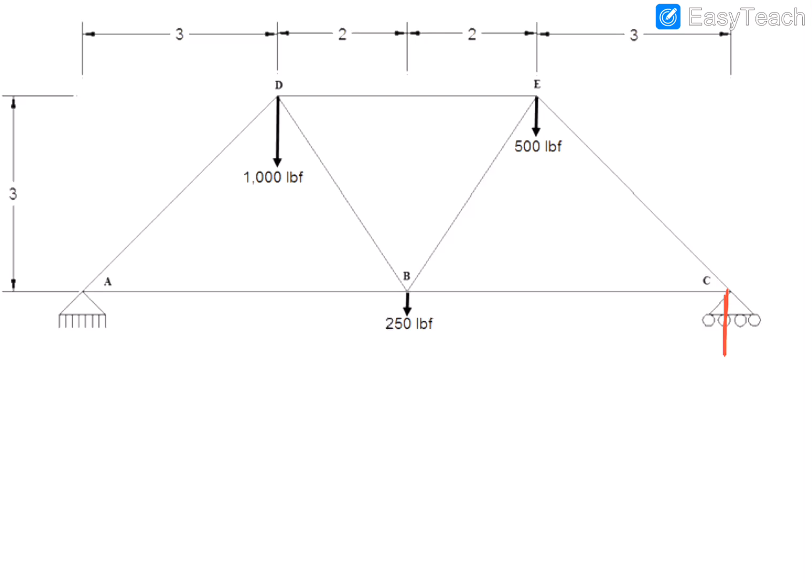All right, let's attempt this big problem here. We have a roller support over here on the right, so that's just going to be some kind of force like this. We have a pin support on the left, so I need to put in 2 forces. That's the first thing we always do. Next thing we want to do is maybe find some angles.

There was no angles given in this thing, so this angle A right here I know has to be 45 degrees because it would be 3 over and then 3 up, so those are equal sides, so I know that that's a 45 degree. That's the same over here, so this is 45 degree too. This thing is all symmetrical. This one here would be 2 over and 3 up. So this is 3 and this is 2.

So the angle here, the tangent of this angle would be the opposite, 3, over the adjacent, 2. I'll do that in the calculator real quick. 3 divided by 2, inverse tangent, I get 56.3. So this one is 56.3, and then this one is 56.3 also. Okay, I'll erase some of these things in here.

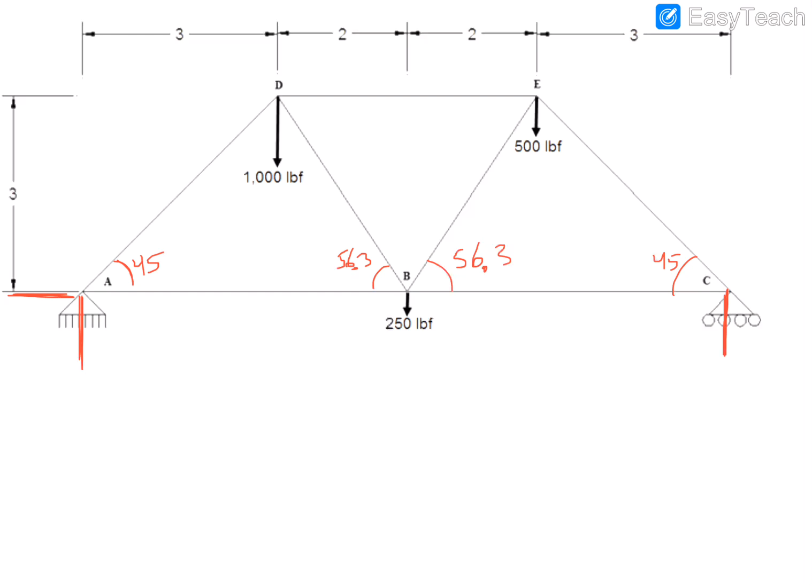All right, okay, that's good. So the first things, remember, we do is we do ups and downs, lefts and rights, and torques. So there is only one possible left or right force right down here on the side, and because there's only one and it needs to be balanced, we know we don't have to worry about it. This actually has to be 0. There's no force going that way. So I'm going to go ahead and erase that whole thing, don't actually need it.

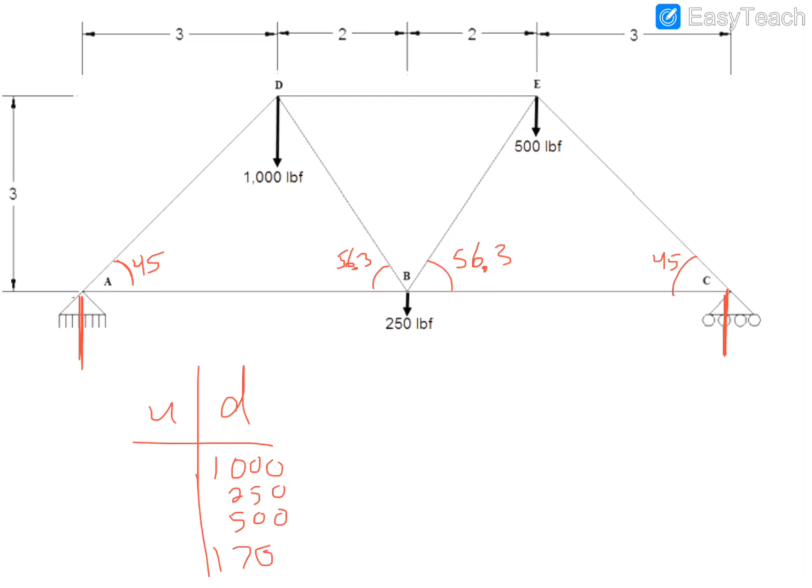Now we have ups and downs, so I'll just make a little chart, ups, downs. We have down is 1,000, we have 250, and we have 500. That's a total of 1,750 down. Ups we have, we'll call this F1, and we'll call this F2. We know that F1 is going to be an up, and F2 is going to be an up. There's going to have to counteract those 3 things. So we want to figure out maybe what F2 is and then be able to figure out what F1 is.

So what we're going to do first is we're going to do torques, clockwise, counterclockwise torques, and we're going to pick one of these sides as our reference point. I'll go ahead and choose this one. So right now we don't have to worry about what F1 is. We can figure out the torque. So if I go all the way over to here, I have a down one right here. That's going to be clockwise, it's going to go around this way.

1,000 times 3, that's clockwise. And then if I come all the way over here to this 250, I have 250 times 5. And then if I come all the way over to here, I have 500 times 7. Those are all clockwise torques.

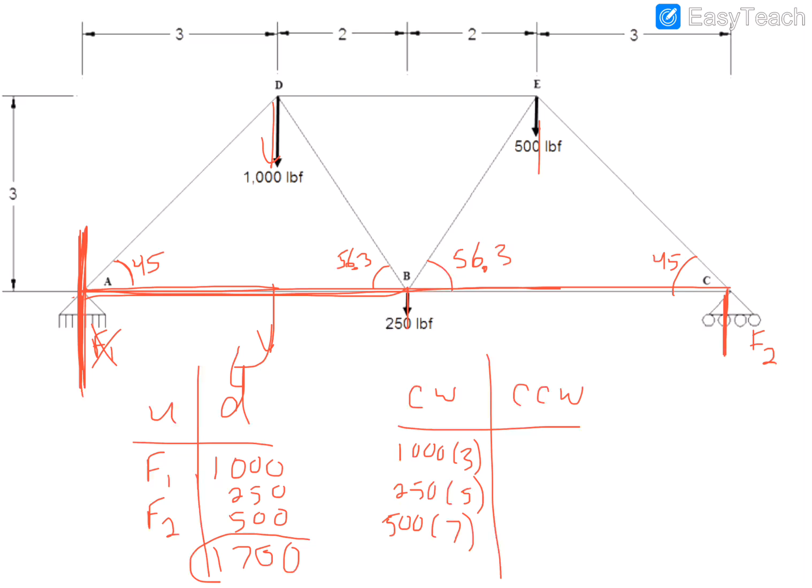Now if I come all the way over here to F2, okay, this has to be an up force to balance out all those other torques, so it's a counterclockwise torque. So F2 times 5, 6, 7, 10, times 10.

Okay, so I can add these all up. I'd have 3,000 plus 1,250 plus 3,500, gives me a total of 7,750. Divide that by 10, and my F2 over here should be 775.

And now I know that this F2 right here is 775. So I can take these downs, 1,750 minus 775, and I know that this over here is 925. Okay, 925, and that's an up force also. And we might want to think, does this make sense, that this one over here on the left is bigger than the one over here on the right? And yes, it does, because here's 1,000 pounds right there, that's bigger, it's kind of more towards this side, so we'd expect this left one to be a lot bigger.

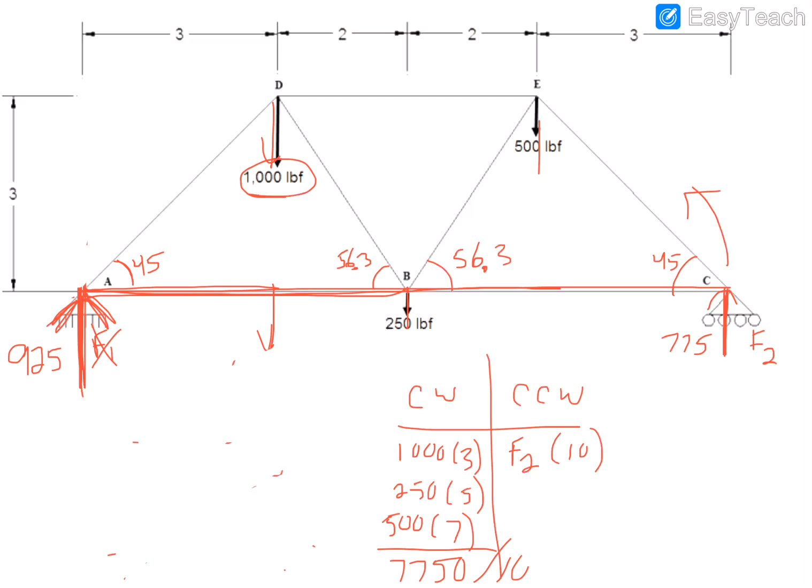Okay, I think we have all of our forces on there now, and we can start doing... are we still going? Okay, I don't know what I did there. Sorry about that, that was a complete mess up. I got out of the program a little bit. Okay, we'll just keep going, it's glitchy. I'm learning this stuff, you know, I'm in quarantine.

All right, so we're going to start doing some internal forces here. We need to pick a joint and start figuring out stuff. So I'm going to go over to this one here, and I have a 775 up. I got something coming this way, I don't know if it's going out or in, and I have something coming on this. Those are my only three possibilities there.

So I know right away this one here has to be... let me erase this arrow here. This one here has to be over to the right and a down. I know that because I have an up here, and this has to be providing the down. And because that's down, I know that that's 775.

Now this is a 45-degree angle, right? So this is a 45-degree angle, and if that's 775, that means this is 775. And I know that this force is going this way now. It's compressing this joint, so it's going to be a negative answer. I can come up here and put in the arrow going the other way too in this member. And this is an easy calculation.

It's the Pythagorean Theorem. So 775 squared plus 775 squared, square root, and I get a negative 1096 for E, whatever that thing is. EC, I guess. EC should be negative 1096.

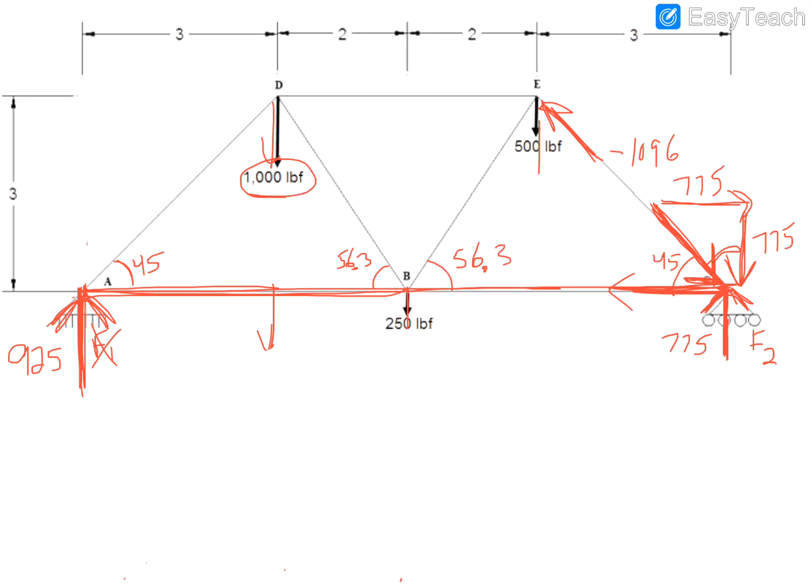Okay, what else do we know? Well, if this was going 775 this way, it has to be going 775 this way. This left has to balance out that right. Again, this down balanced out this up. So if this is going this way, then I can come over here and do this. And these are tensions because they're pulling away from the joints. That's a plus, and I know it's 775. So I actually have another answer, BC. BC should be a plus 775.

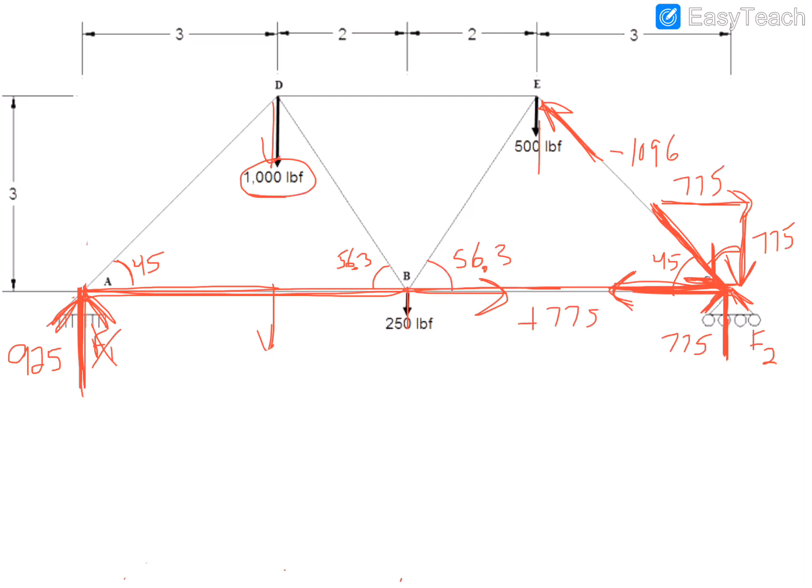All right, let's go back over here to the other side, kind of do the same thing we can do over here. So this was 925 going up. This thing I know then has to go over and down, and this has to be 925, and this has to be 925. And since this is going to the left 925, then this is going to the right 925, and that means it's coming in this way. And this is a tension, so this is a tension of a plus 925.

So we got another one done. AB is a plus 925, I think. I hope that's right, I think I tried to write down the answer wrong earlier, so we'll see. Okay, so then I have a 925 squared plus 925 squared equals square root, and I get a...

Let's see, for the AD, I think I have something wrong. I need to go back. Was this 925 or is this 975? I have a bad feeling it's 975. Let's see, I erased all my torques, so that's great.

1,000 times 3, plus 250 times 5, plus 500 times 5, 6, 7, equals, divide by 10 was 775, and then all my downs.

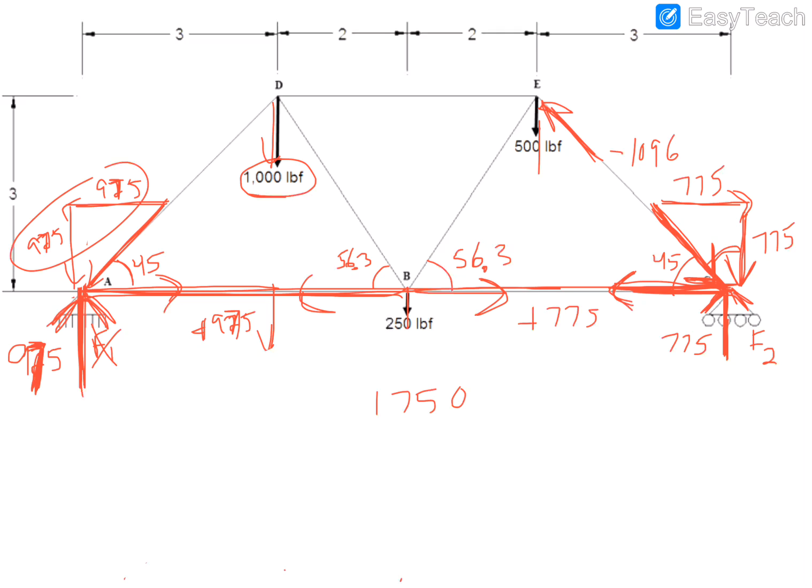Sorry about all that again, I'm winging this one pretty badly. So this right here, AB is 975, a plus 975. And then if I do the 975 squared, this part right here, I get a negative because this is going to be going into this, going to be a compression like this. I get a negative 1379. You can check the math there. Okay, so we got a lot of them done now.

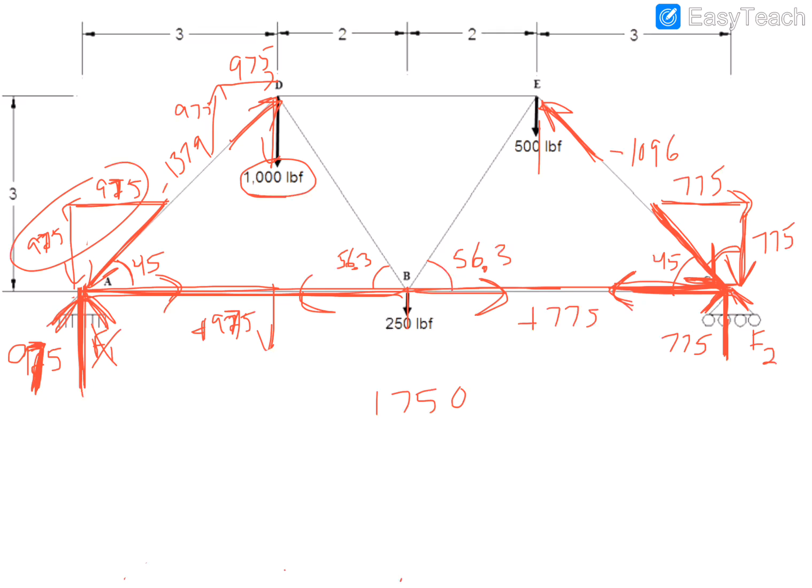Let's go up, let's go up to here. So I know that this going in like this is a 975 up and a 975 over. Okay, I know that for a fact. I know I have 1,000 down right here. Let's see, what else do we have here?

Okay, let me come over here too, and I can make sure that I got this going up 775, and this would be going over 775.

Okay, so let's stay over here on this side for a quick second. This is 500 down, and this is 775 up. So what do I still need? I have 775 up, I have 500 down. I need another 275 down to balance these out. 275 plus 500 would be 775 up. So that's how I know which way this thing is going.

This thing has to be going down like this because it's going to be going over and down like this. And I know that this down here has to be 275, so that'll balance all my ups and downs out.

Okay, what is this part here? So I'm going to need an angle in here. I actually know if this angle is 56.3, this angle is 56.3 also. So I can do tangent

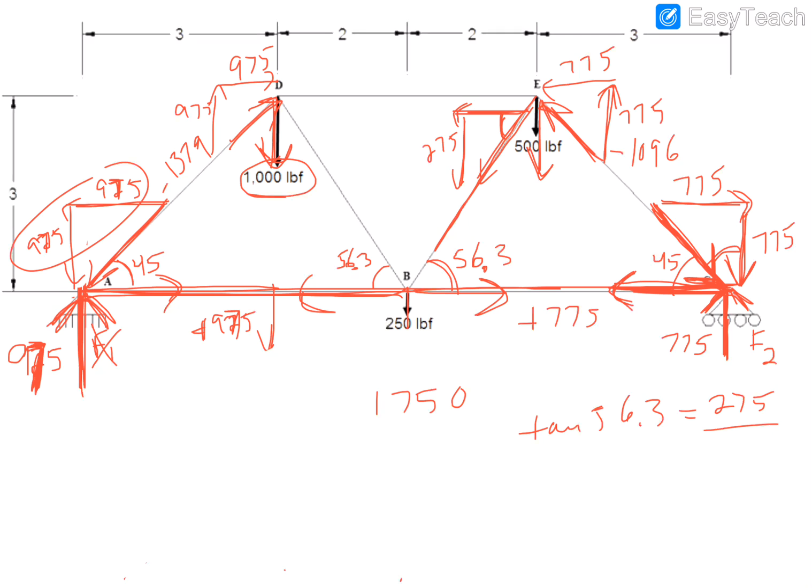of 56.3. Tangent of 56.3 would equal the opposite, 275. So the opposite of this angle here would be this side over this side, x. So x would equal 275 over the tangent of 56.3. So I'll do that in the calculator.

I hope you're following this, this is a good problem. Divided by 56.3 tangent equals, it's 183. So this in here is 183. Okay, and now I can do Pythagorean theorem on both these things.

So 275 squared plus 183 squared equals square root. I get 330 basically. Let's see, that's BE. So this would be coming out to be a tension, so this would be like a plus 330.

A plus 330. Now if we come back up here to this point, E, let's think about this. Now we have 775 up on this part, was the up component of this. We have a 500 down. We have a 275 down, so this plus this equaled that, so my ups and downs are balanced. Now what about my lefts and rights?

I have a 775 to the left. This component here gave me a 183 to the left, which means what? I can add those together and figure out what this thing is, right? Because this thing has to be whatever these two are together. So 775 plus 183 equals 958. And that's going to be coming in like that.

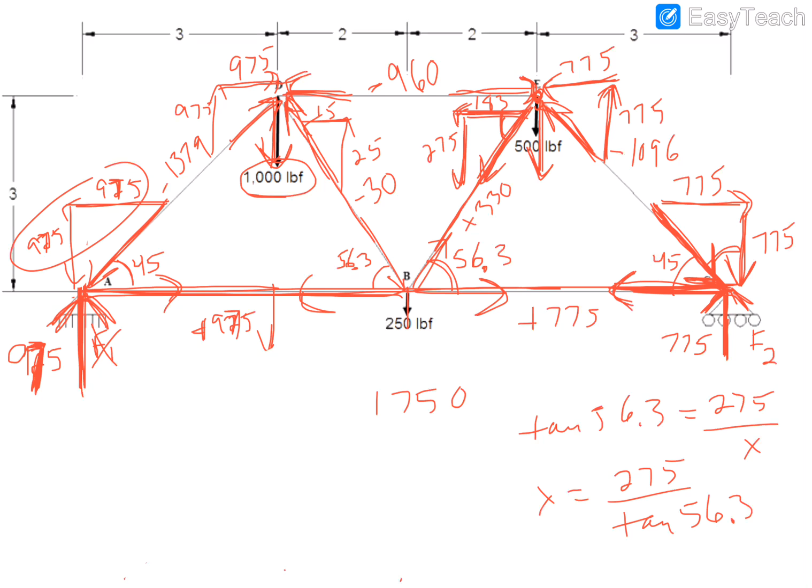I think we got every single member, right? 1, 2, 3, 4, 5, 6, 7. We got all the members figured out. Sorry that took so long.